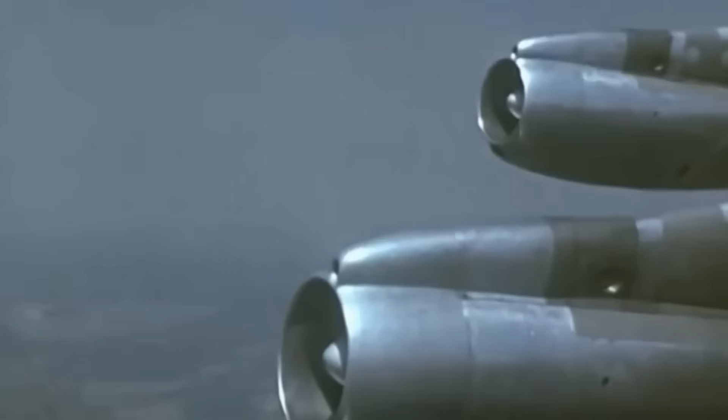Back in the 1960s, Pratt & Whitney ruled the skies. Riding high on Boeing's success, it dominated commercial aviation. Its booming profits sent a loud message to the engine world: forget the battlefield, civil aviation is where the real money flies.

Across the Atlantic, France's Snecma, fresh off building engines for the Concorde, was eager to join the race. They aimed to create a mid-thrust turbofan to take on Pratt. But Concorde's commercial flop had left scars, so Snecma didn't dare go it alone. They needed a partner, a strong one. Looking around, Rolls-Royce was too busy saving itself from bankruptcy.

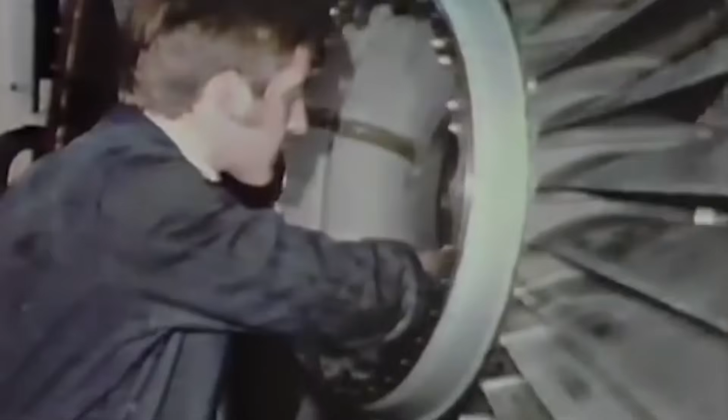Globally, there weren't many who could build jet engines at this level. After much thought, the French turned to a giant, General Electric. At that time, GE was a military powerhouse with limited presence in civil aviation, but it too was looking for a way in.

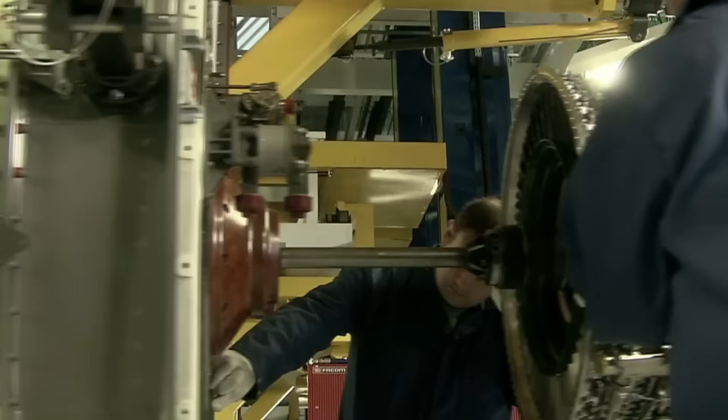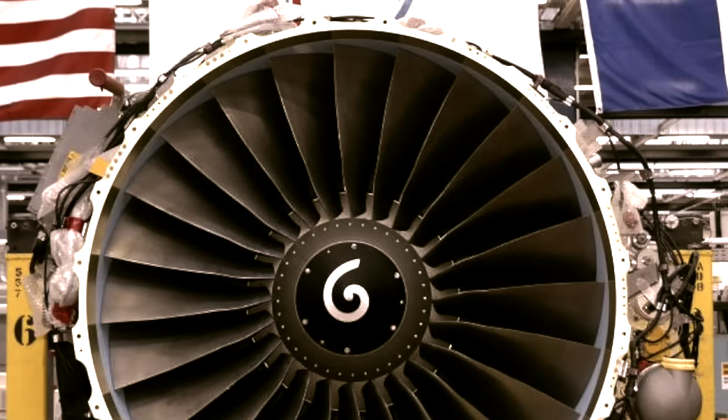At the 1971 Paris Air Show, while the Soviet Tu-144 roared overhead, Snecma quietly approached GE. One meeting, a few glasses of red wine, and the deal was born. They shook hands on a plan to co-develop an engine, with shared costs and shared dreams. Three years later, the first engine was born, the CFM56. It wasn't smooth. French romance and American risk-taking clashed more than once, sparking intense friction that at times threw the future of the CFM56 into doubt.

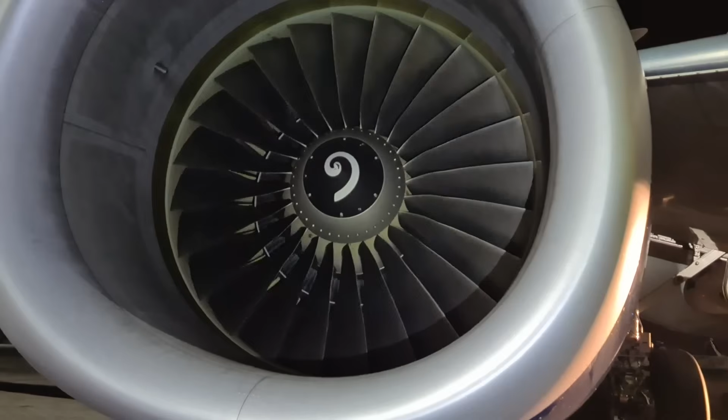But no one expected what happened next. In the decades that followed, this engine didn't just compete, it took over the jet engine market with near-total dominance. To date, over 33,000 CFM56 engines have been delivered, and roughly 28,000 are still flying.

From Boeing 737s to Airbus A320, from the KC-135 tanker to the P-8A patrol jet, a plane powered by a CFM56 takes off every 2 seconds somewhere in the world. It has logged over 1 billion flight hours with a mind-blowing 99.96% reliability rate. In China, where maintenance is top-notch, that number reaches 99.99%. That's not just engineering, that's magic.

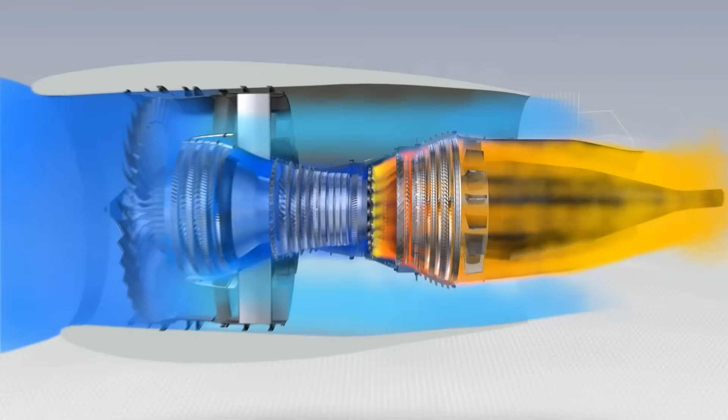Its design philosophy has shaped generations of engines. Even China's WS-10, the engine for the J-20 stealth fighter, traces distant roots back to the CFM56. Half a century has passed, but CFM56 still roars across the skies. In the aviation world, it's often called the most perfect engine ever built. That's not just praise, that's the heartfelt respect of thousands of pilots, engineers, and airlines who trust it day after day.

Unlike today's engines with fully independent designs, jet engines for passenger planes in the 1960s were mostly modified versions of military models. For example, the Boeing 707, which truly brought civil aviation into the jet age, used the Pratt & Whitney JT3C engine. This engine was actually based on the J-57 turbojet made for the US Air Force's B-52 bomber.

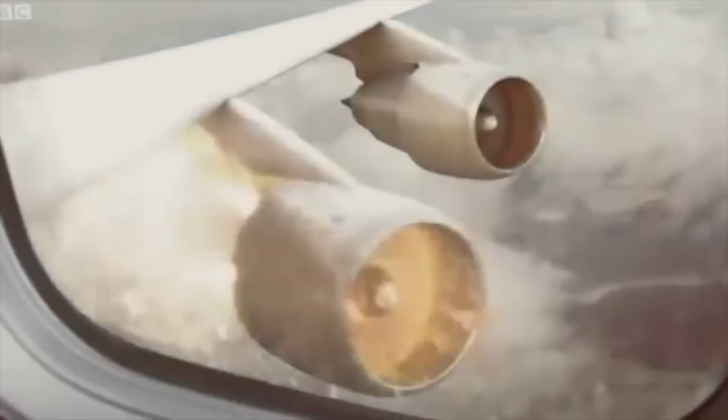The advantage was clear: you didn't have to start from scratch. This saved time and cut development costs, but the downsides were serious. These half-military engines burned a huge amount of fuel and weren't very reliable. They often gave passengers and pilots a mental stress test mid-flight. They also ignored environmental and noise regulations, focusing only on brute force.

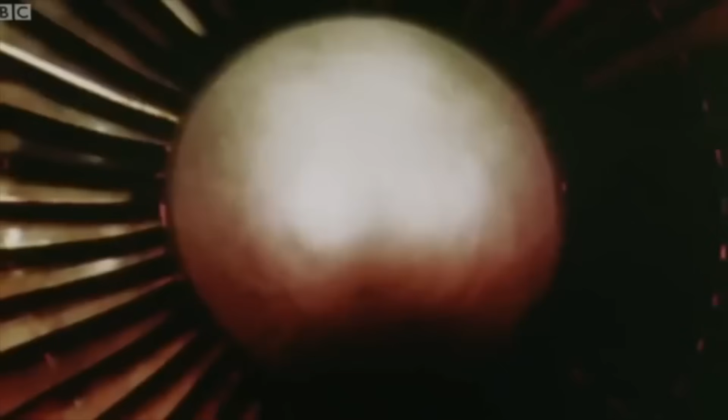Using military bones to build civil wings was the shortcut of early jetliners. Pratt & Whitney led the way by launching the JT-3C from the J-57 and the JT-8D from the J-52. Military and civil models grew together, but as fuel prices rose and regulations tightened, civil aviation needed engines built for its own future.

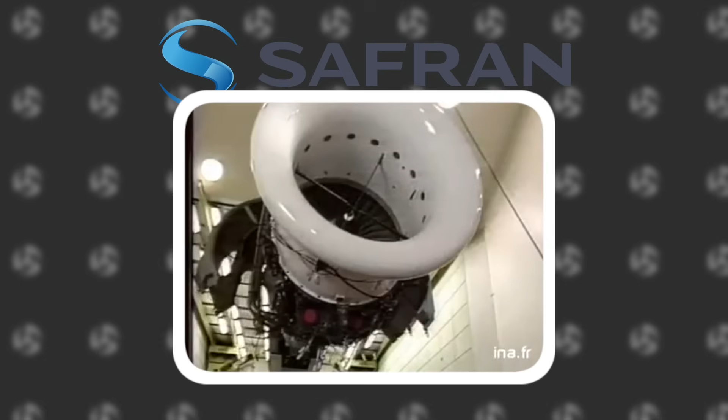France's Snecma, now known as Safran, began developing a new 10-ton thrust civil engine in the mid-1960s. They were among the first to realize that the gap between civil and military engines would keep growing, so they hoped to use some military technologies, add their own innovations, and design a new engine with lower noise and better fuel efficiency. This engine was called the M56.

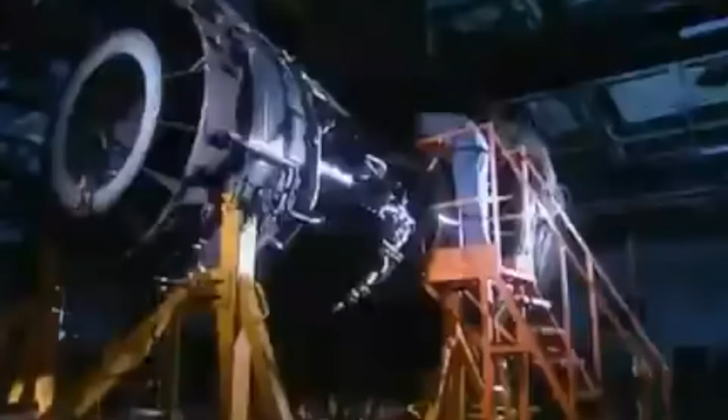As the project moved forward, Snecma realized they lacked strength in R&D, manufacturing, and marketing. Without help, the project would surely fail. They decided to look for a partner to co-develop, produce, and sell the new engine. At the time, Pratt & Whitney dominated, Rolls-Royce was in bankruptcy, leaving GE the only option.

Coincidentally, GE envied Pratt's success, hating others' profits more than its own losses. And with both leaders being World War II veterans, they clicked at their first meeting. A cross-border partnership naturally formed. Each side invested 50% and combined GE's civil engine code CF with Snecma's M56 to create the CFM56.

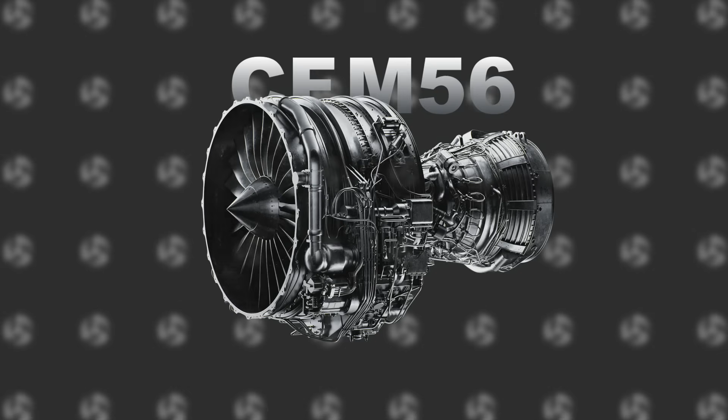Early talks went smoothly, but real problems emerged once work began. After GE joined the project, they aimed high. To show their sincerity, they offered the core technology of their F101 engine.

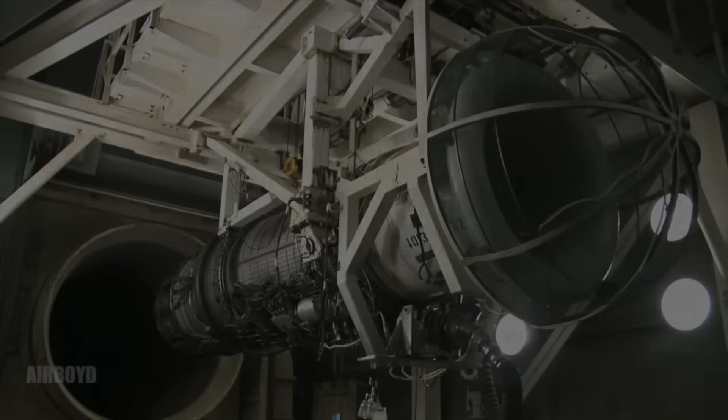The F101 was the most advanced engine of its time. It powered the B-1 Lancer supersonic bomber and outperformed all its peers.

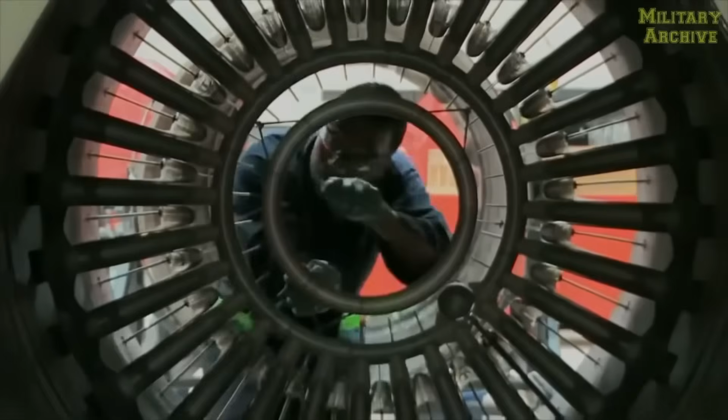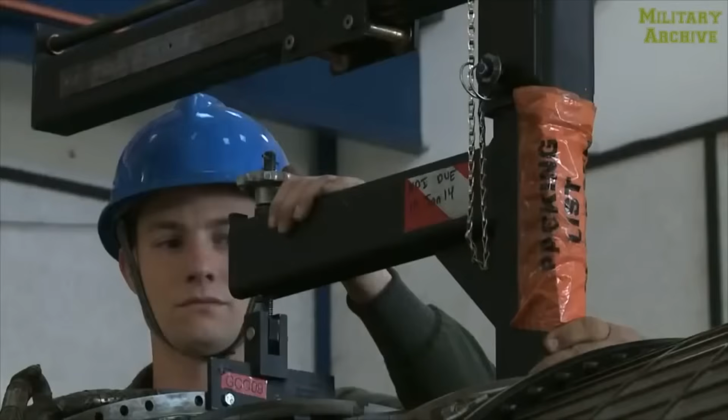In the turbine section, GE developed high-temperature resistant blades and precise internal cooling channels. These features helped the core turbine run stably in gas flows close to 1600 degrees Celsius. As a result, it lasted longer and needed fewer overhauls.

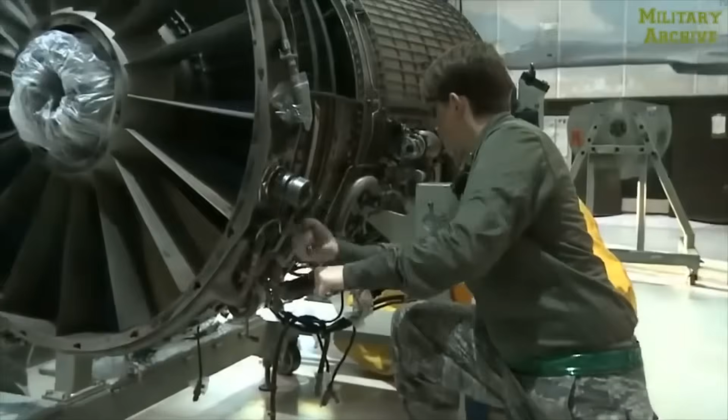This decision shocked the French side and almost killed the entire project. Luckily, the French government valued this partnership highly. President Georges Pompidou personally lobbied US President Nixon whenever possible.

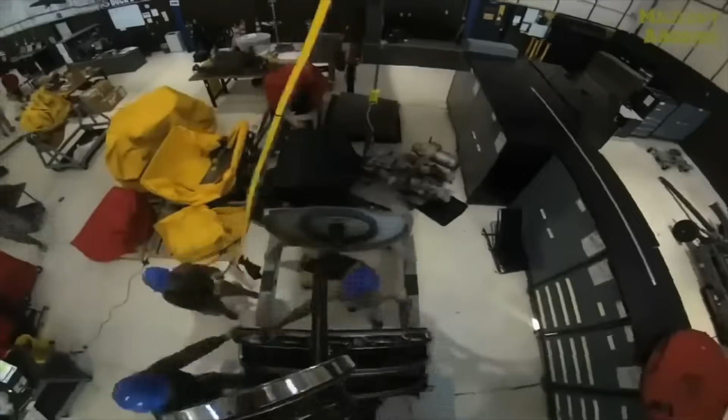GE also had its concerns. If the deal fell through and SNECMA finished the engine alone, GE might lose its chance to enter the market at all. So General Electric stepped in and joined the lobbying efforts as well. Eventually, at the 1973 US-France summit, both sides reached a hard-won agreement.

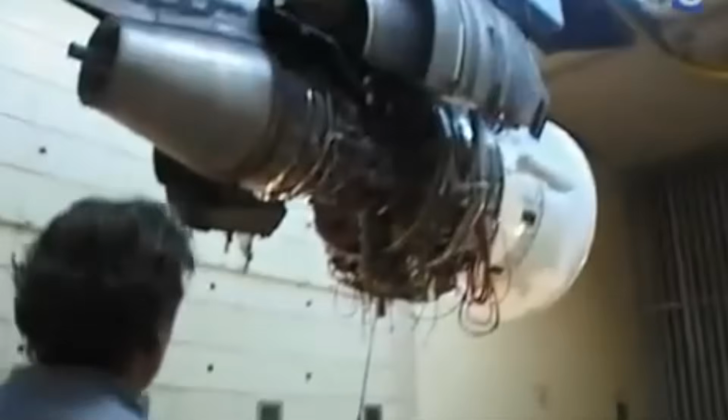It's said that France paid a heavy price to gain US approval. The engine's core had to be built in the US and shipped to France. There, GE engineers assembled it in isolation rooms. French staff were not allowed to participate at all, to prevent leaks of sensitive technology.

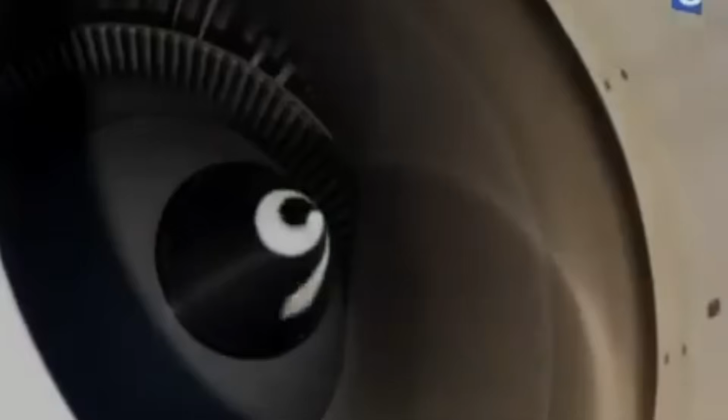This fragmented process worsened friction between the teams. They disagreed on standards, switched constantly between imperial and metric units, and even struggled with engineering language. On top of that, France had to pay $80 million in licensing fees as compensation for development costs. More importantly, the French government promised not to impose tariffs on future US aircraft imported into Europe.

Fortunately, the deal worked. The US finally approved the use of F-101 technology for the CFM56 project. Since GE had offered its best, SNECMA couldn't hold back either.

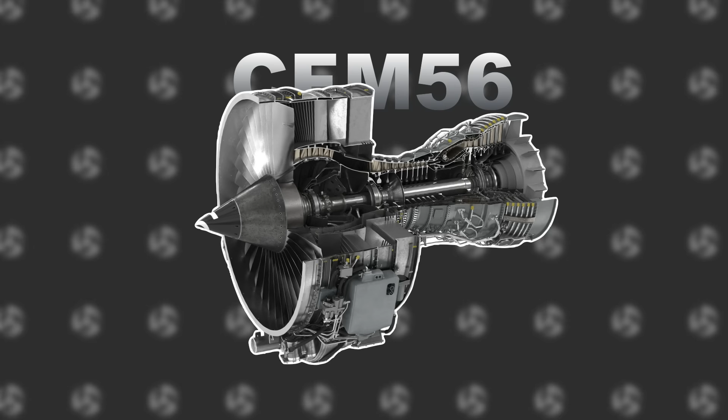SNECMA handled the front fan and low-pressure turbine, designing them from scratch for civil use without copying military designs. They designed 44 wide-tip titanium blades, each shrouded 1.73 meters across, providing 78% of thrust. Blade shrouds cut airflow separation and vibration, boosting low-mid-speed efficiency and raising the bypass ratio to 5.1 to 1.

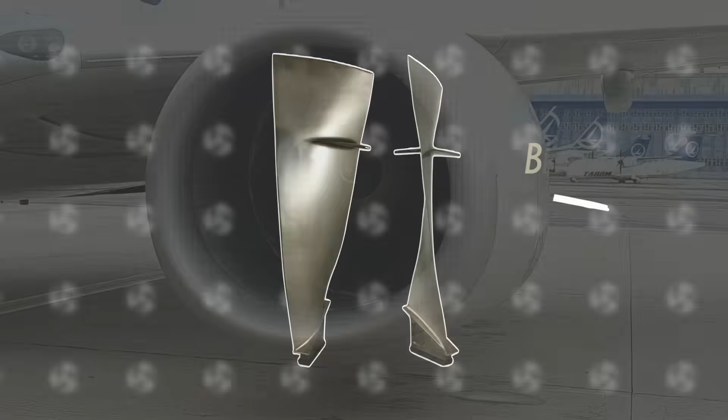This high bypass layout saved fuel, reduced noise, and drove the CFM56's strong economics. More importantly, the CFM56 was modular from the start. If a blade was damaged, it could be replaced without removing the whole engine. This greatly reduced maintenance time and cost.

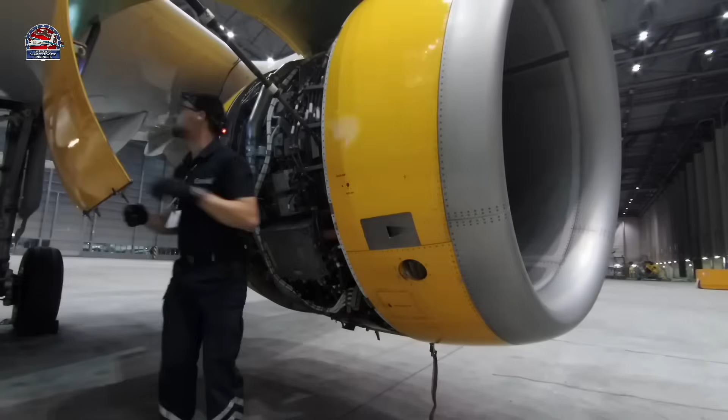The modular design also allowed for a global training system. Airline technicians could use standard manuals to learn module removal and inspection, improving airworthiness and efficiency, and it's still an industry benchmark today. In 1974, as development neared completion, Safran and GE signed the final agreement to form a joint venture.

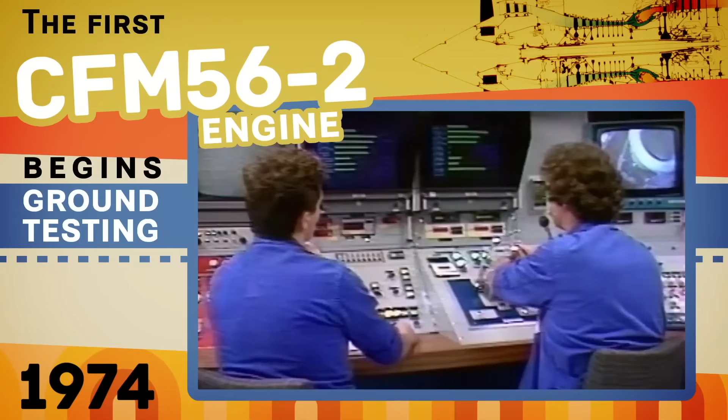They named the company after the project code, CFM International. In June that year, the first CFM56 engine was tested on a stand. As the gears inside turned, so did the gears of aviation history.

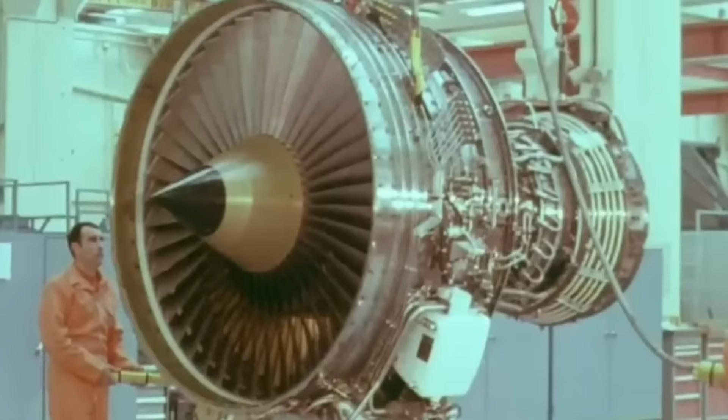Beyond its design, the CFM56 took a bold step in sales strategy. Due to the high risks from massive development costs, civil jet engines used to be built only after securing firm orders. Every engine had a buyer before it was born. But the CFM56 did the opposite. It became the first engine developed before having any customers.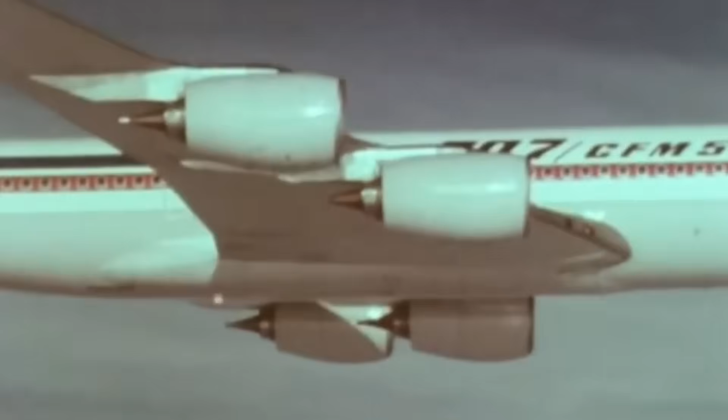At the critical moment, a military order CFM least expected saved the engine. In 1977, the US Air Force, fed up with the old Pratt and Whitney J57s, began re-engining KC-135s. How bad were they? Before takeoff, crews had to pump 2,500 liters of water into each engine just so the plane could lift off. It was practically the jet engine world's GP2.

Having invested heavily in the CFM56 project, the French government seized the moment, announcing that France's 11 KC-135s would skip bidding and re-engine with the CFM56.

The results were clear. Thrust nearly doubled over the J57, and fuel use fell 25%. This let the KC-135 cut takeoff distance by 1,100 meters, add 1,000 kilometers of range, climb 900 meters higher, and sharply reduce noise.

The US Air Force was shocked. They cursed the old Pratt and Whitney engines, then ordered all 500-plus KC-135s refitted with the CFM56, over 2,000 engines at once. Five years after CFM's founding and eight years after project start, the CFM56 got its first major order.

With the military leading, airlines saw engine swaps were possible. In March 1979, United Airlines became the first, upgrading 30 DC-8s with the CFM56. This marked its entry into civil aviation. From then on, CFM had stepped into commercial flight.

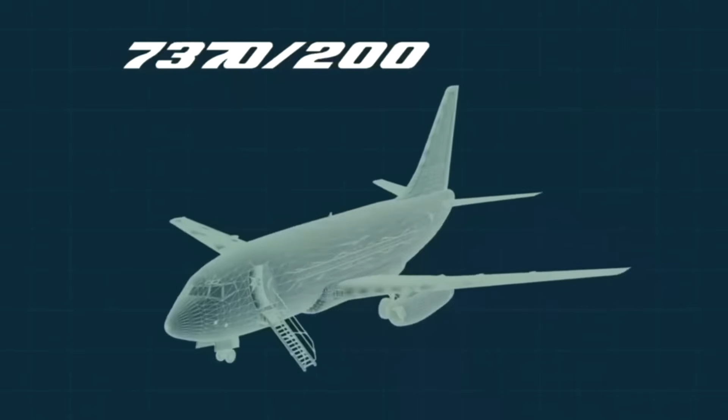But retrofits were small. What really lifted the CFM56 was the aviation giant Boeing. In 1980, to meet customer demand and stricter noise and environmental regulations, Boeing launched its first major upgrade of the 737 series, moving from the 737 Original to the 737 Classic.

At that time, in the 10-ton thrust class, the CFM56's only rival was Pratt & Whitney's old JT-8D. The result was clear: Boeing chose the more advanced CFM56 for all 737 Classics.

Due to the 737's naturally short landing gear, its wings sit close to the ground. So engineers had to make several changes to the engine. They reduced the fan diameter, which lowered the bypass ratio, and moved the accessory gearbox from the bottom to the side. This gave the engine a unique flat-bottom shape, which became a visual signature of later 737 models.

This version of the engine was named the CFM56-3. Although these changes slightly reduced its thrust, the CFM56-3 still far outperformed the older JT-8D, especially in fuel efficiency, noise levels, and reliability. Its performance gave Boeing engineers new design freedom, ending the JT-8D's limits.

The 737-300 was 2.9 meters longer than the 737-200. It could carry up to 149 passengers. It also had more room for electronics, bringing a major upgrade to the 737's cockpit systems.

The later -400 variants went even further, offering larger fuselages and cargo bays. They also improved aerodynamics. These changes boosted handling, safety, and fuel economy. The numbers told the story: Boeing delivered 1,988 737 Classics, cementing the CFM56's expansion into civil aviation.

In the 1980s, Airbus announced a new narrow-body aircraft, the A320, directly targeting the Boeing 737. With half European roots and US success, CFM aimed to return home in glory.

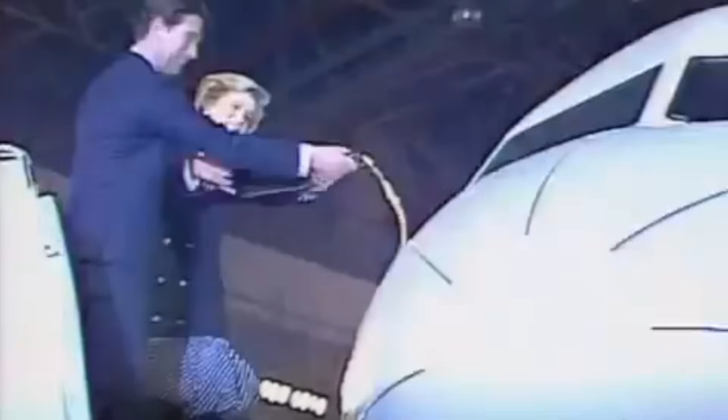At first, CFM planned a CFM56-4 based on the Dash 2, but this time the competition wouldn't be easy. The CFM56 was no longer facing the outdated JT-8D. Its new rival was a next-generation engine built by global aerospace giants: the IAE V2500.

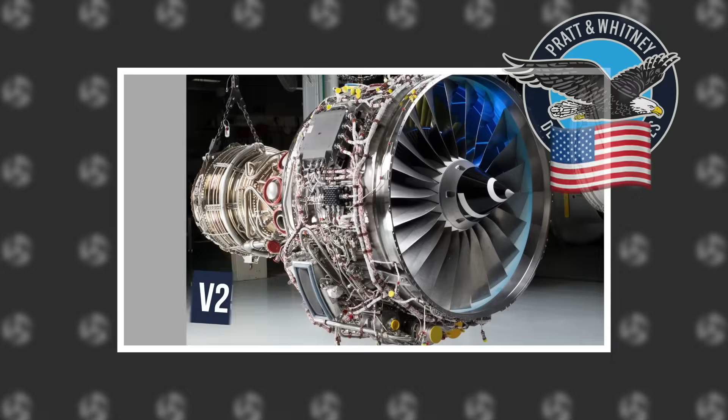Behind the IAE stood a luxury dream team: Pratt & Whitney from the US, Rolls-Royce from the UK, MTU from Germany, and Japan Aero Engines, each a giant in its own right.

Pratt handled the high-pressure turbine and combustion chamber. Rolls-Royce did the high-pressure compressor. MTU took care of the low-pressure turbine. Japan managed the fan and low-pressure compressor. They combined strengths to push fuel efficiency even further.

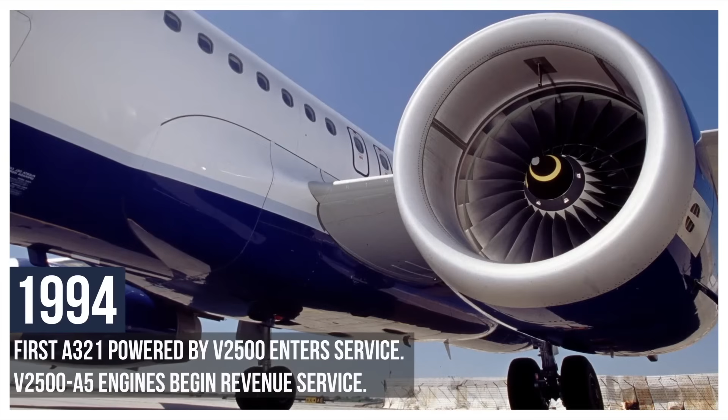With bold innovation and a star-studded team, the V2500 looked great on paper. It made the CFM56-4 seem outdated. Wait, am I the JT-8D now?

Facing this challenge, CFM dropped the 56-4 plan without hesitation. Instead, they redesigned the engine from the inside out and introduced the all-new CFM56-5A. The upgrade had three key changes.

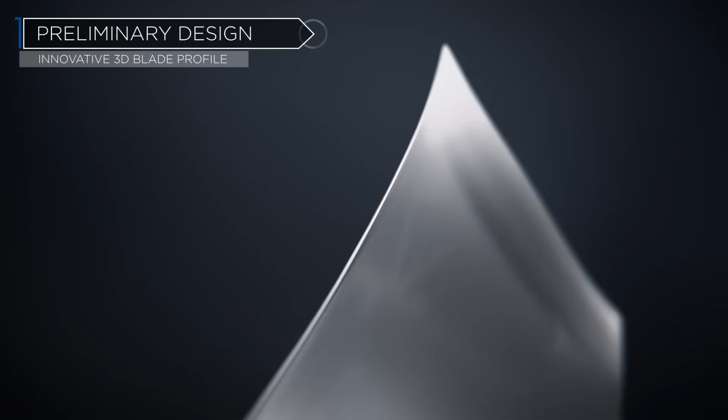First, the fan and compressor used 3D aerodynamics for better, more stable airflow. Second, improved aerodynamics raised fan efficiency, letting engineers cut blades from 44 to 36, reducing weight by 15% and cutting noise.

Most importantly, they added FADEC, the full authority digital engine control, first seen on the PW2000 for the 757 and soon standard on all modern engines.

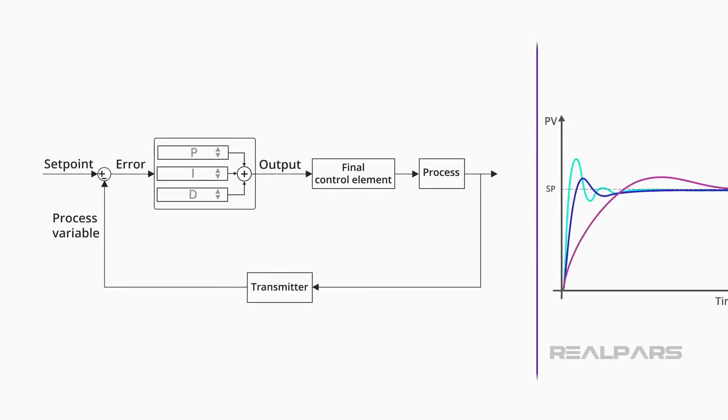FADEC combines control algorithms like PID and MPC. It's like giving the engine a brain. It controls fuel injection and thrust response to the millisecond, optimizing output at every stage for better efficiency and precision. Even with these upgrades, the CFM56 kept its legendary reliability and easy maintenance, the key to turning the tide later.

As the A320 entered service, airlines gradually realized something. Though the V2500's innovations promised better fuel burn, its complex structure caused a spike in maintenance costs and failure rates. Even a simple repair required removing the whole engine. Each service could take 2 to 3 days. MTU even built a dedicated repair line for the V2500. One engine was enough to feed a whole business.

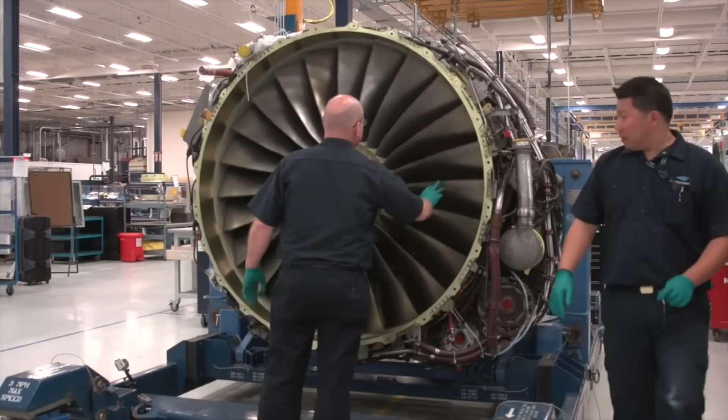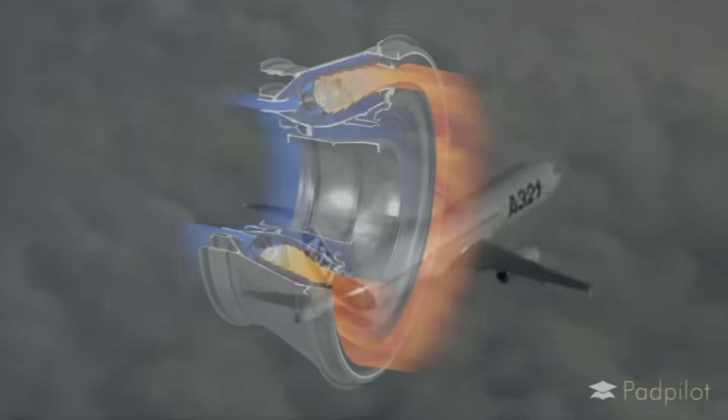In contrast, the CFM56 stuck with its modular design. A single fan repair usually took just 8 hours. In fast-paced airline operations, that made all the difference. Later, CFM developed the CFM56-5B for the A321, using a dual annular combustor. The inner ring worked during cruise. The outer ring kicked in for higher thrust. The engine could switch between them automatically, further improving fuel burn and cutting emissions to meet EU standards.

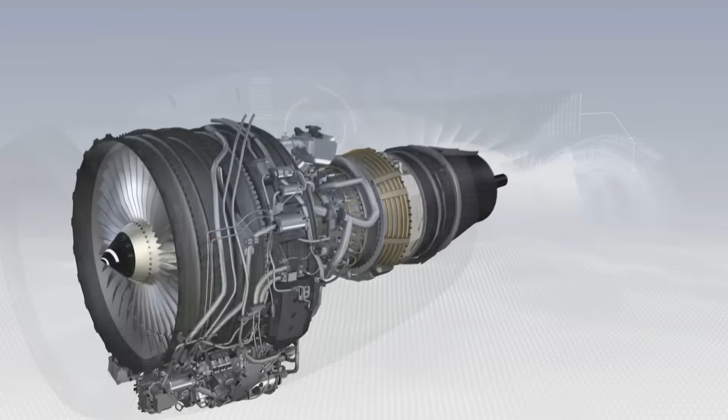In decades of real-world operation, the CFM56-5 series could fly up to 14,000 hours before its first overhaul. Even after overhaul, it still ran over 10,000 hours stably. A typical A320 flies about 3,500 hours a year, so one CFM56 could fly nearly 4 years without needing a shop visit. That left its rivals far behind. Even though it didn't win on paper specs, the CFM56 came out on top with better reliability, easier maintenance, and lower lifetime cost. It beat the V2500 and became the main engine of the A320 family, taking over 60% of the market.

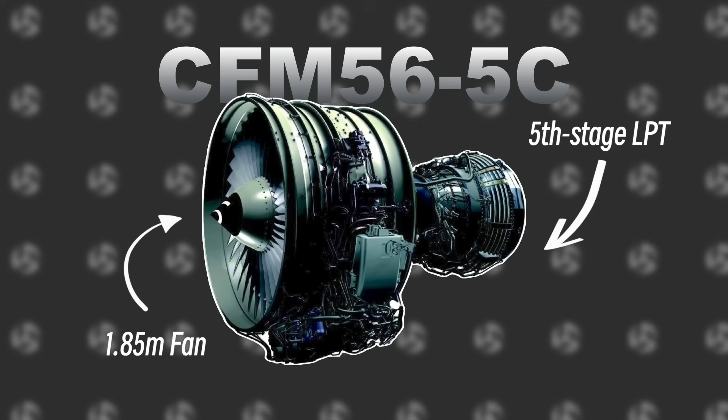And of course, when talking about the CFM56-5 series, one engine can't be ignored, the CFM56-5C. It had a huge 1.85 meter fan, a 6.5 bypass ratio, an extra fifth stage in the low-pressure turbine, and 151 kilonewtons max thrust. It was the strongest in the entire CFM56 lineup. The engineers tried their best to push it to the limit. But there was one problem. The 5C was built for the wide-body A340.

The first-generation A340 came with 4 APUs. Well, not really. It had 4 engines, but not out of necessity. It was more a reluctant compromise with the regulations. To fly across oceans, Airbus had to install 4 engines to meet the regulations at the time. But when IAE suddenly backed out, the A340 was left in an awkward situation with no engine to use. Still, there's nothing 2 CFM56s can't fix. And if 2 aren't enough, just add 2 more. So the CFM56 became the emergency power source for the A340.

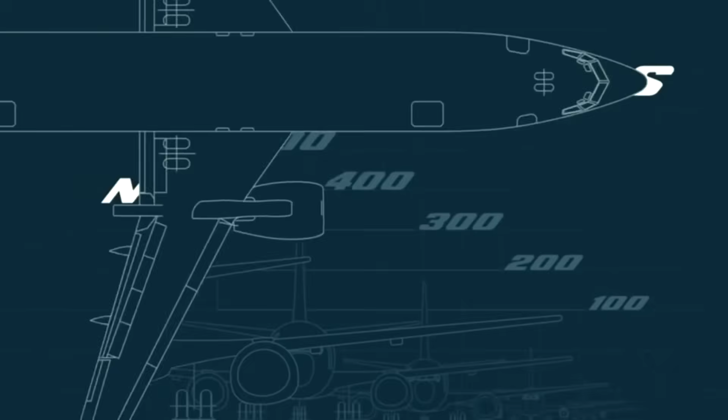In the 1990s, the A320 series gained market share with fly-by-wire and better fuel efficiency. Boeing could no longer sit still. They launched the second major upgrade of the 737 series, the 737 Next Generation. The new aircraft targeted what airlines valued most: better fuel efficiency, longer range, more seats, and strong performance in complex global environments, aiming to reclaim its voice in the narrow-body market.

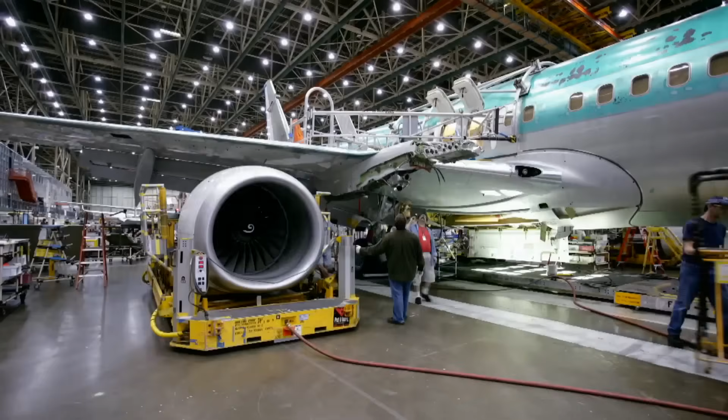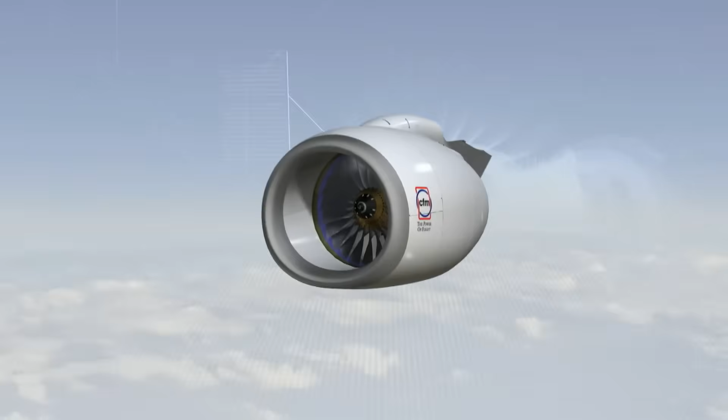Given the CFM56's solid performance on the 737 Classic, Boeing again chose CFM as the sole engine supplier for the 737 NG. Learning from the V2500 experience, CFM didn't go for flashy features. Instead, they focused on what airlines actually needed. This led to the CFM56-7B, a product built on practical thinking. The biggest improvement in the 7B was its fan blade design. It used a controlled diffusion airfoil, or CDA blade.

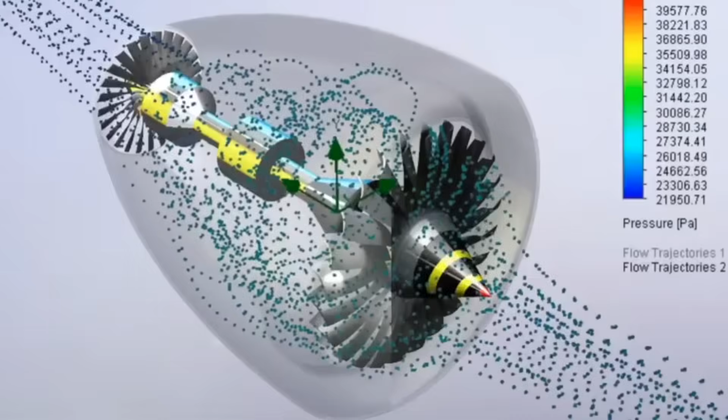With help from CFD analysis, the blade's thickness and curvature were fine-tuned. This made airflow smoother and reduced boundary layer separation, which significantly improved aerodynamic efficiency. The wide-chord blade had a thicker leading and trailing edge. It was structurally stronger and more resistant to erosion and bird strikes, but it was also heavier, putting more centrifugal load on the disc.

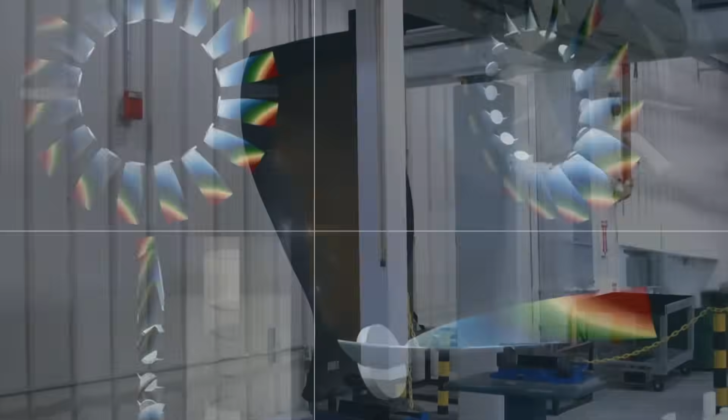Most engines would solve this by using advanced, lightweight hollow blades or composite materials, but after repeated tests, the CFM team found a simpler solution. For a medium-thrust engine with a fan diameter of just 1.6 meters, reinforcing the disc was enough to handle the solid blades. Thanks to aerodynamic improvements, the fan now needed only 24 blades. That was 20 fewer than the original CFM56. This made manufacturing and maintenance much easier, and struck a perfect balance between performance and cost.

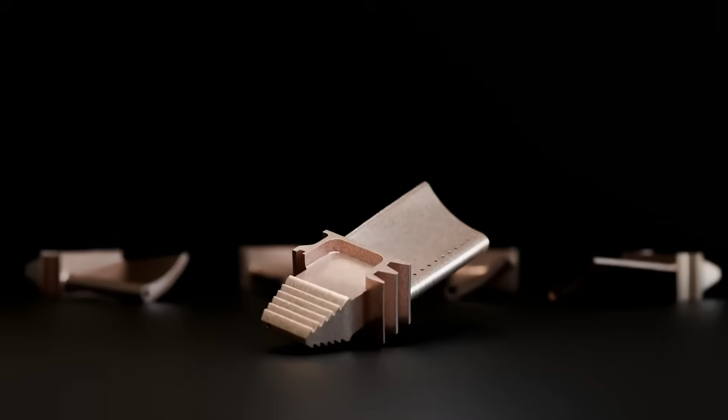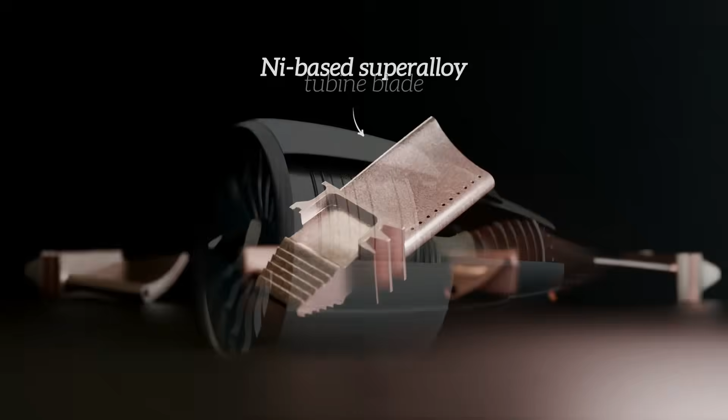Also, back in the F101 engine, GE had already used advanced single-crystal nickel alloy turbine blades. They were extremely resistant to high-temperature fatigue and considered a masterpiece of materials engineering, but the cost was too high for use in the CFM56 series. For engineers, it was the one dream they couldn't touch. Now, times had changed. With progress in materials science, the CFM56-7B finally brought this dream to life.

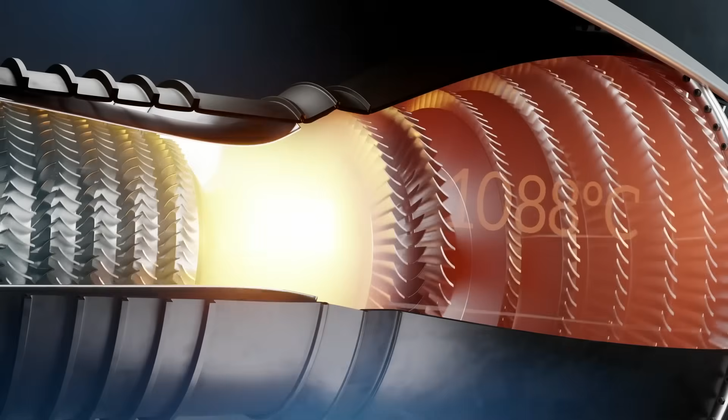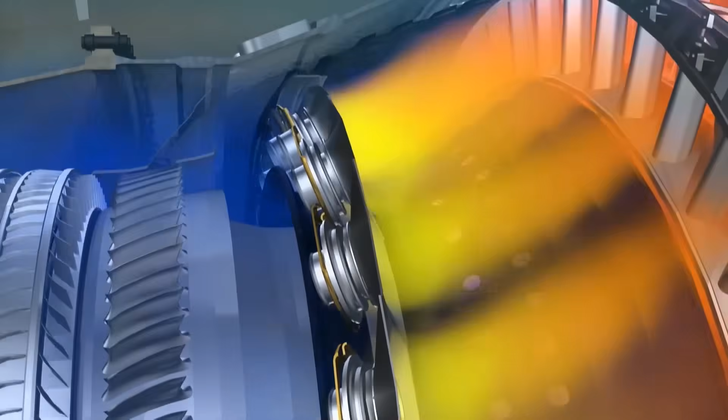Its high-pressure turbine blades were upgraded to GE's second-generation single-crystal nickel alloy. In addition to nickel, the alloy also included boron, carbon, and yttrium. Boron and carbon helped extend blade life under heat. Yttrium, a rare earth element, greatly improved thermal fatigue resistance at high temperatures. With this, the CFM56-7B was now using the complete version of the F101 core. Its durability reached a whole new level.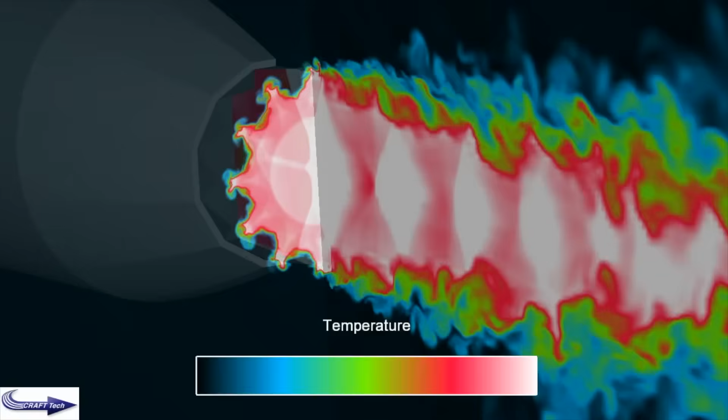It's worth mentioning that the CFM56-7B also tested a serrated nacelle design to reduce noise. Surprised? The first to try a serrated nacelle wasn't the Boeing 787, it was the CFM56. Though it was never officially used on the 737NG, this experiment laid the foundation for later designs on the 787 and 737 MAX.

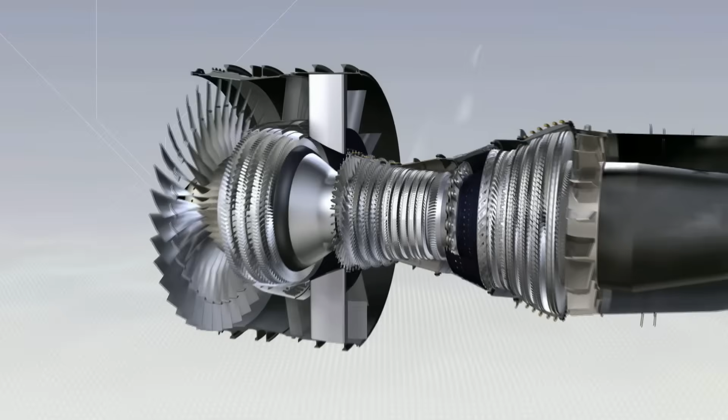Thanks to its solid design and outstanding reliability, the CFM56-7B gave the 737NG excellent adaptability. From short-haul high-frequency routes to high-altitude, high-heat, high-humidity, or extreme cold, the 7B stayed steady and strong, which fit narrow-body operators like a glove. This civil engine even returned to military service, withstanding vibrations and salt spray, and became the standard for the US Navy's P-8A patrol aircraft. Maybe the only thing it couldn't withstand was the decoy flare from the J-16.

This fly-a-lot, break-a-little reliability proved itself in commercial service. In 2014, a Xiamen Airlines 737 with a CFM56-7B ran 9 years, 27,458 hours, and 19,491 cycles before its first shop visit, setting the CFM56 record for longest pre-overhaul service. This proved its safety and lowered engine cost per hour, boosting airline profit. With the CFM56-7B, Boeing delivered 7,110 737 NGs worldwide, with a fatal accident rate of just 0.09 per million flights. It became one of the safest, best-selling aircraft ever.

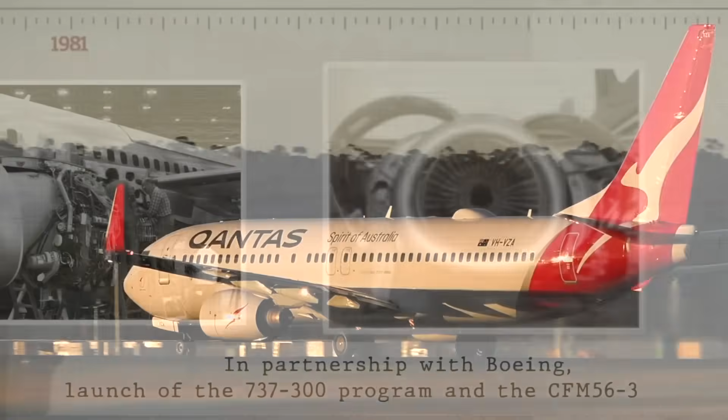In the brilliant CFM56 family, the 7B may not be the most powerful, but it's the one that fits real-world airline operations best. The CFM56-7B wasn't made to show off technology. It was made for the airline's daily balance sheet, and that's exactly why it became the most widely used turbofan engine in aviation history. In fact, the CFM56-7B's success is just one chapter in the CFM56 legend. From the very beginning, it had no customers, no platform, and nearly died before it was born. Yet today, it has become the most widely used civil turbofan engine in the world.

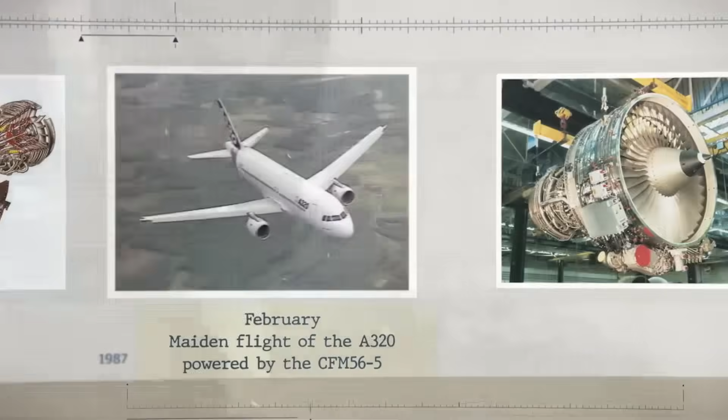What drove this transformation wasn't just technical breakthroughs. It was a deep understanding of reality and a relentless pursuit of reliability. The CFM56 never showed off, yet it always stood firm in times of change. It never rushed ahead, yet its full life cost kept winning airlines over. It never chased the spotlight, yet kept evolving in small, steady steps to meet new rules and new demands.

Looking at today's aviation world, Pratt & Whitney bet big on the GTF engine and nearly lost it all. Rolls-Royce just can't let go of its 3-shaft turbofans, and the one that was called conservative, CFM, has quietly become the king of narrow-body jets. Thanks to steady upgrades and flexible strategy, the CFM56 still remains under the wing, flying high above the sky. You may never find the CFM56 breathtaking, but it always flies, always fixes, and always earns your trust.

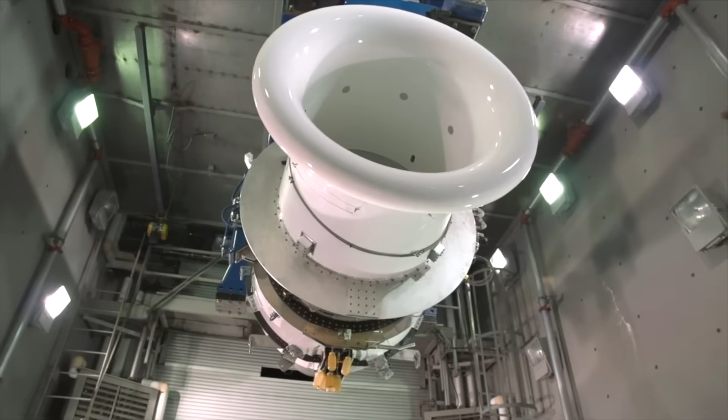But no flower blooms forever, and no engine stays young. Now in its 50s, the CFM56 is starting to feel the weight of a new era. So how did CFM respond?